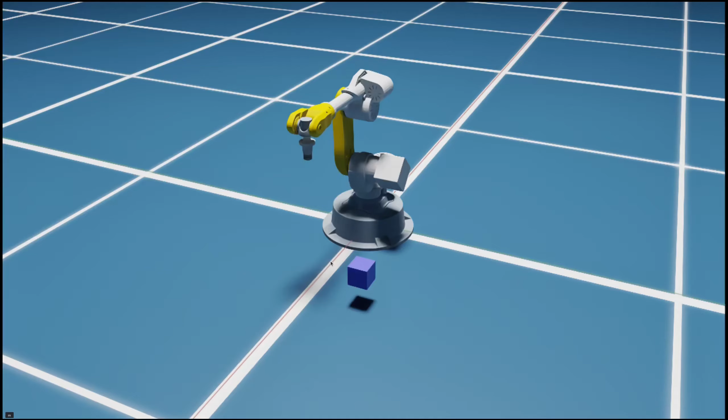In this video, I'll show you how to import your custom manipulator models in Isaac Sim. Additionally, I'll show you how to integrate that manipulator with the Isaac Python API, including joint controlling and executing pick and place, and finally interacting with real hardware. So let's get into it.

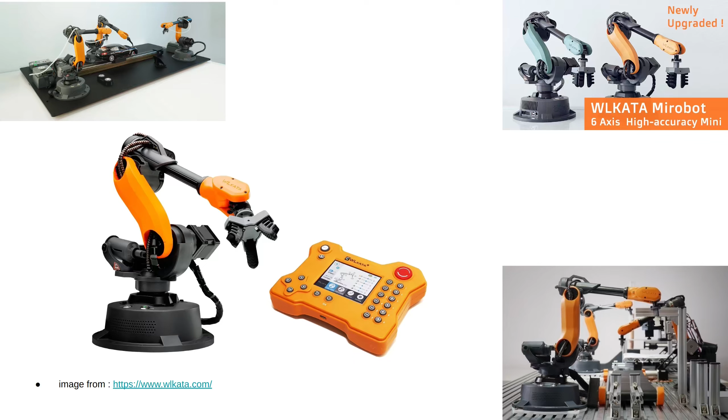The manipulator I'll be using in this video is the Mirobot, an educational robot from WLKATA. It has a total of 6 axes and is priced about 1.8k USD. And since it provides CAD files and URDF files, I think it'll be easier to integrate into Isaac Sim.

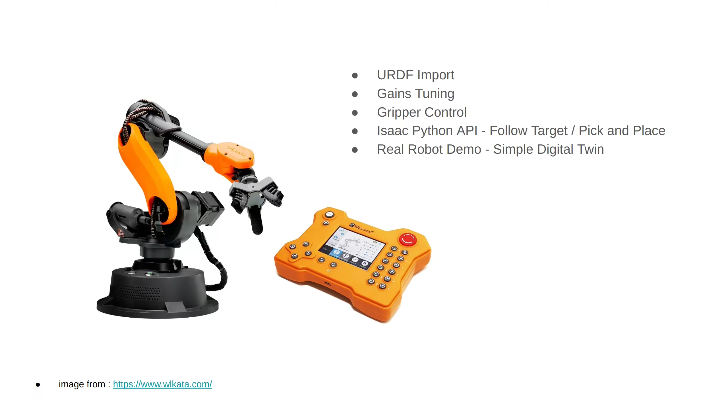Next, I'll cover the following topics in this video. First, URDF importing: import your robot to Isaac Sim based on its URDF. Second, tuning the gains of your robot's joints for more realistic robot movements. And third, implementing a surface gripper in Isaac Sim for grasping objects.

And fourth, follow target and pick and place examples. Isaac Sim already has some fancy, great examples made in Python. So learning from the provided examples, I'm gonna show you how to implement and integrate that into the Isaac Sim model. And finally, I implemented a simple digital twin via ROS 2 and also show you how to set up the physical robot. You'll need the URDF file for your robot.

In the case of the Mirobot, a well-configured URDF is already provided, so I'm gonna use that. Even if you don't have a URDF file, most CAD programs like SolidWorks or Fusion 360 already offer URDF exporters, something like that. So give it a try with that.

Before importing the URDF into Isaac Sim, there's a crucial point: the latest version of Isaac Sim. The latest version now is 2023.1.1. This one has a bug when importing fixed robots like manipulators. Therefore, I'll be using version 2022.2.1, this one, only for the URDF importer.

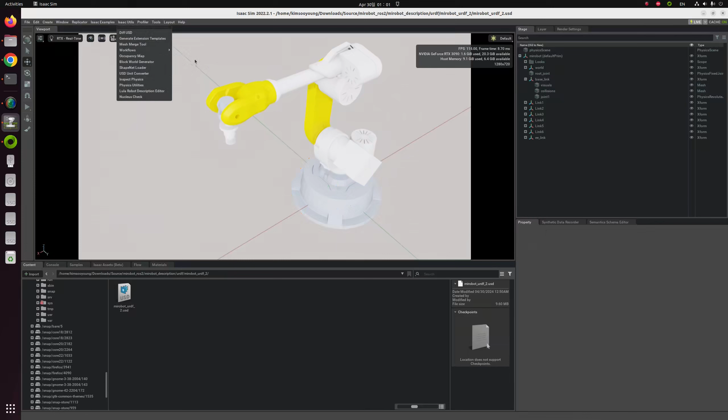Let's make it bigger and open the gain tuner under Isaac utils and workflows. Here it is, gain tuner, and press the play button. From the selection panel, select articulation and click your robot. You might see many parameters like this.

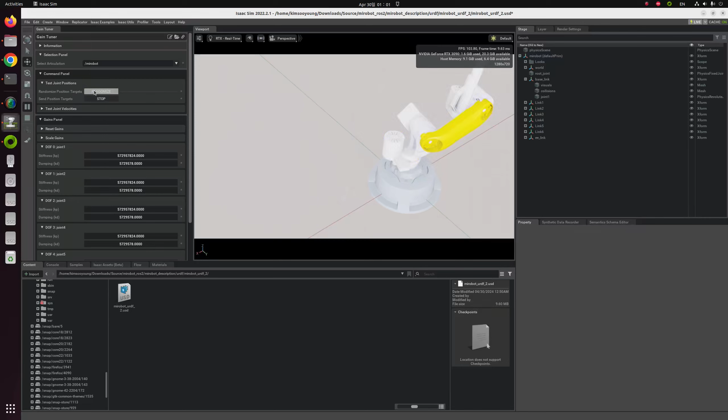I'll briefly talk about those parameters later. But for now, just click the start button and click the randomize button several times, and check that your manipulator works well and successfully arrives at the target points.

As I mentioned earlier in this tutorial, I will not tune those gains precisely. Instead, if the robot is functioning well like this, you can just keep going. However, if your new robot moves too slowly or too radically, you might have to adjust those parameters.

There are two kinds of parameters: first is stiffness, second is damping. Stiffness is like a spring, something like that. If the spring is too stiff, it will move more radically.

The second one, damping, is something that distorts your joint movements. Therefore, if the damping becomes too much larger, then even if I click this randomize button, the joints over here will not arrive at the target points, because some huge disrupting force is blocking this joint. So let me change those parameters to be smaller.

Yeah, as you see here, since damping becomes smaller, it starts to move. Therefore, you might have to adjust those two parameters, stiffness and damping, properly and save your USD file again.

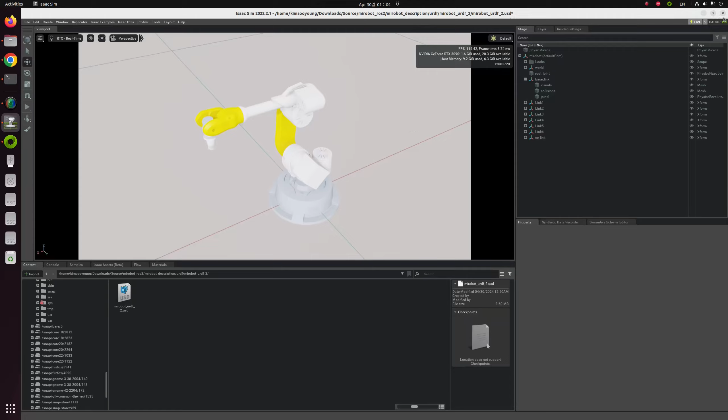Save the file like this. If you successfully saved your new USD file, now, as I said before, you have to exit this Isaac Sim 2022 version and turn on the brand new Isaac Sim 2023 version. Let's keep it up with the start button.

At this point, to prepare for upcoming examples, I would recommend cloning two GitHub repositories I have prepared. Firstly, clone this Mirobot ROS 2 repository.

And in my case, I did it here. Don't forget to recover your previous URDF folder. In my case, its name was URDF_PREV, so I deleted this folder and renamed it back to URDF_2.

Next, launch the Nucleus Navigator and click the launch button. Then upload the entire repository in your Nucleus server, like this.

To be honest, since I have multiple projects going on, I made this project folder and this RBROS2 folder, and I uploaded my repository over here. So you can change your folder to whatever you want. However, you have to keep in mind where you located this Mirobot ROS 2 folder, and you might have to change the path in the code.

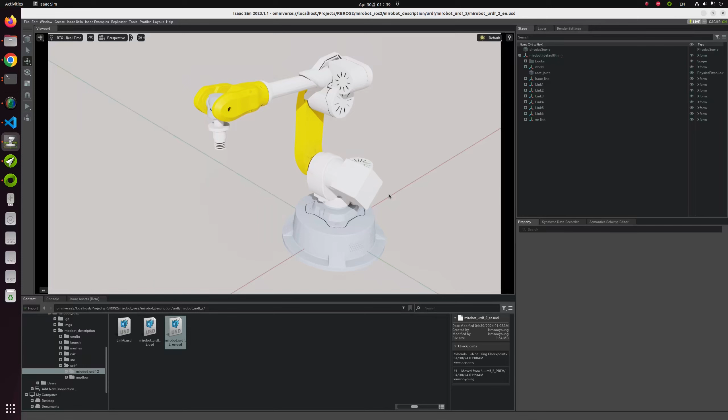However, to grasp and manipulate objects, we need to set up an end effector, something like a surface gripper or parallel gripper. In order to attach a surface gripper to our robot, there are two crucial points. First, according to the Isaac Sim documentation, the surface gripper operates exclusively along the x-axis. Therefore, the local coordinate system of the end effector must also be oriented along the x-axis, pointing downwards.

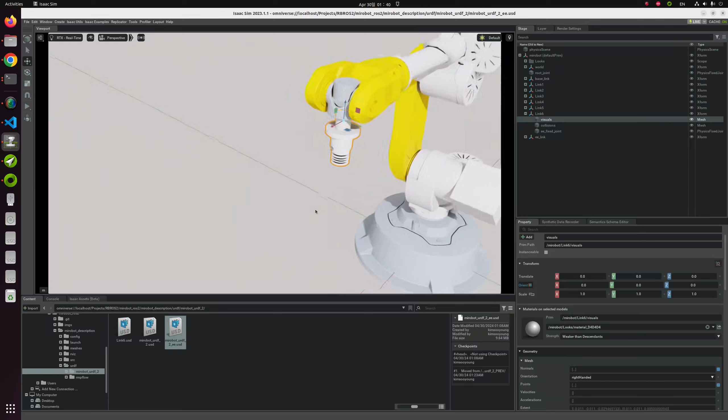If you look here, it looks like the x-axis is facing the front of the board. However, if I press the W button, it changes into local frame like this - it toggles between the local and world frame. Therefore, in the local coordinate system, the x-axis is now pointing downwards. You have to set up your URDF file in this way.

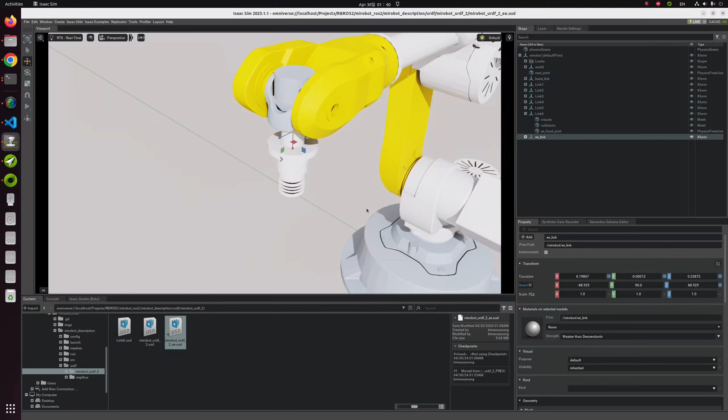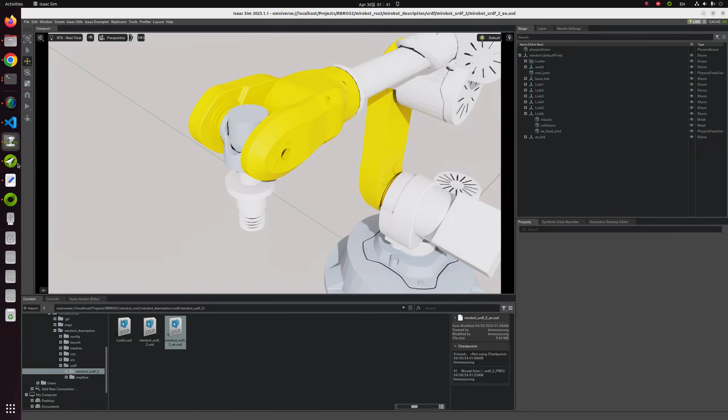In the URDF file of the mirobot, such considerations were not present. Thus, I created a new link called the EE link, the end effector link, and recreated the USD file within the URDF importer. The thing you have to keep in mind is that in order to use the URDF importer, you should not launch Isaac Sim 2023, but instead launch Isaac Sim 2022.

So launch the 2022 version and import again, save the USD file, exit, and launch this 2023 version again and import again. It's kind of tough, but yeah, now it has some bug in the 2023 version, so keep that in mind.

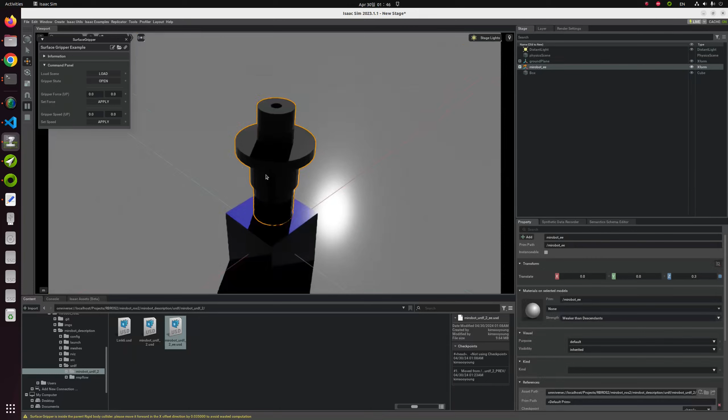For understanding how the surface gripper works, I made a simple example program. Click on the Isaac examples, navigate through the mirobot example, click on this surface gripper button, and click on this load button. If you do so, you can watch the surface gripper of the mirobot, and a small box appears.

Let's click this button and change the state of our gripper into closed state by clicking this open button, and let's apply some little bit of force through clicking this apply button. Oh, I made a mistake again. Let's do that again and click this close button and apply.

As you see here, you can watch that this gripper is holding the objects. Therefore, if I apply some force onto the gripper, the objects will move together with our gripper. It allows you to test whether the gripper has correctly grasped the object and to what extent force is needed to move your object.

Let's move to the code. From surface gripper, surface gripper.python code, line 300. You can check that there are various kinds of parameters for your surface gripper, including force limit and torque limit, something like that. So tune the code according to your gripper model, and also try to change the geometric and physical parameters of your objects into your own objects.

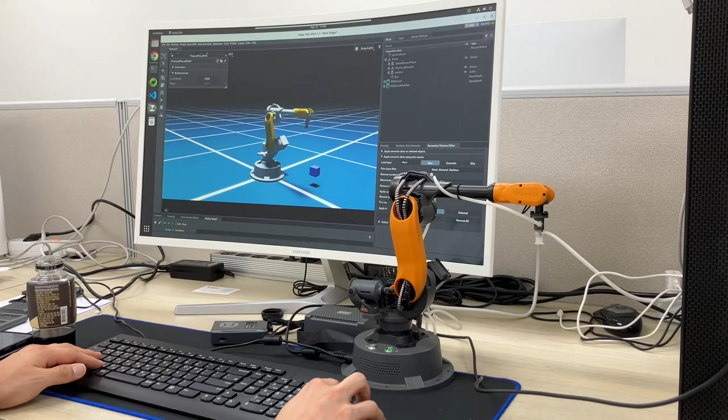We'll cover a detailed explanation of this in another video. Anyway, by transmitting the joint state topic published in Isaac Sim to the real robot and making the real robot act accordingly, you can implement a simple digital twin application.